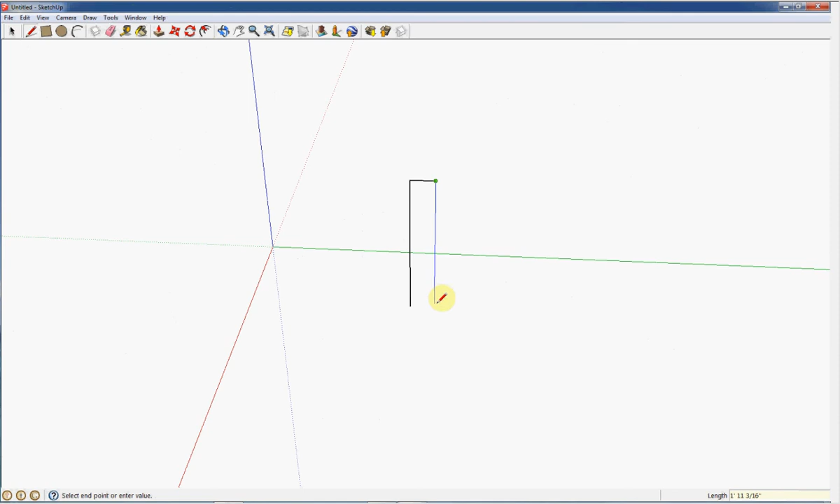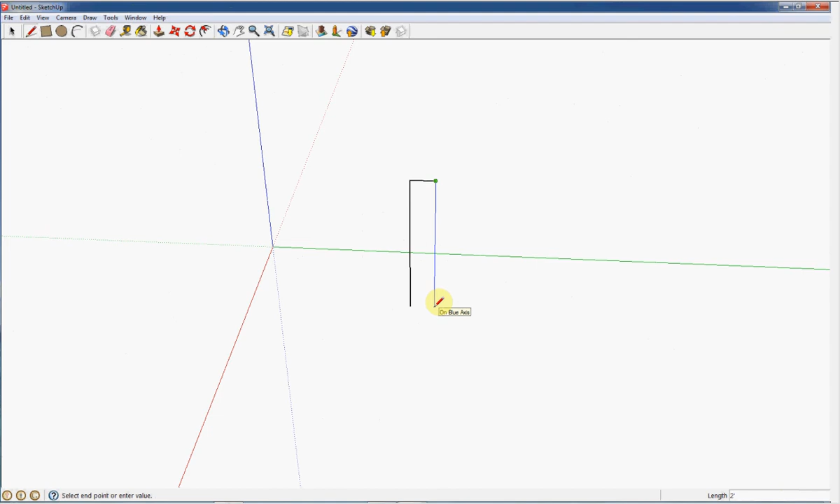Many times when working with SketchUp, if you're not sure where a corner or point is and you want to build to that point to make sure everything aligns, you go to the point you want, then start moving, and it'll give you a hash line showing you where you need to be. It doesn't work 100% of the time, but it works probably a good 90% of the time.

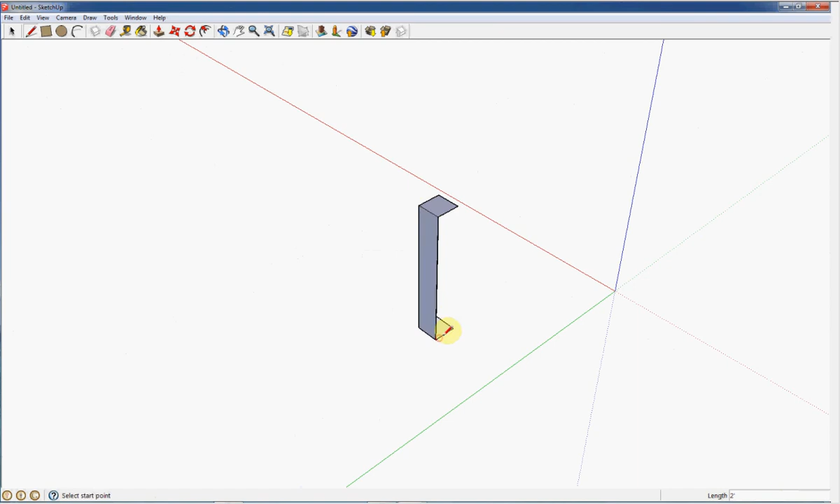It'll tell you which axis you're on almost all the time, and you'll see the hashed lines letting you know your axis is correct and that what you're building lines up with what you've already built, or the lines you're drawing line up with the rest of your diagram, or whatever it is you happen to be building that day.

This is just me showing you that the dimensions are what we say. You can go to tools — there you can use the dimensions, which is exactly what I'm doing. You can move them and make them come out any way you like.

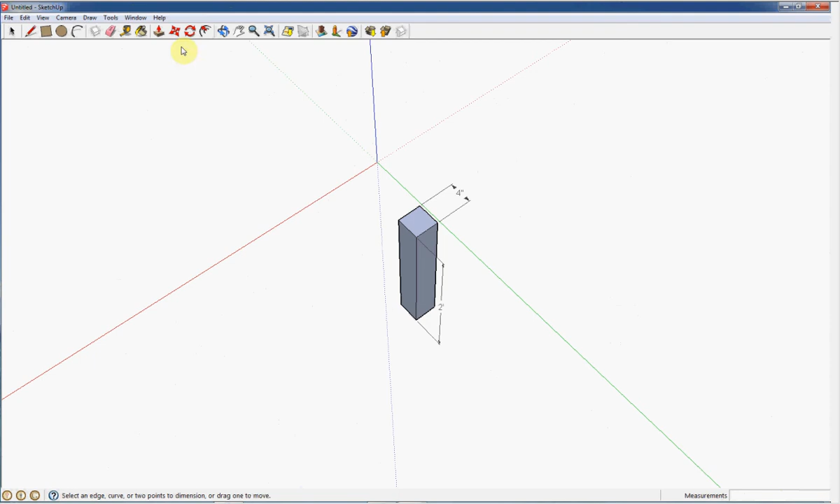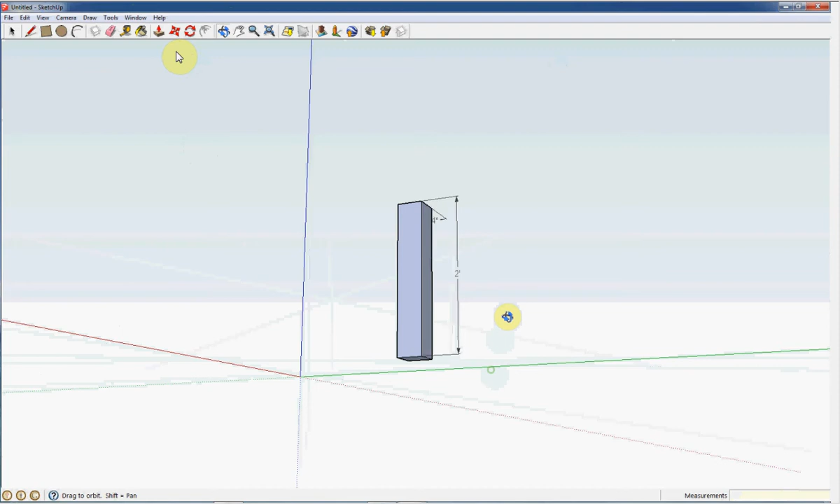Now I'm using this tool, which will enable you to create the thickness for the tube we're using. I'm going back over and backing up a little so you can see better. This tool is called the offset tool — yes, the offset tool. All you have to do is click the outer edge, and it will start creating...

...the box in the middle.

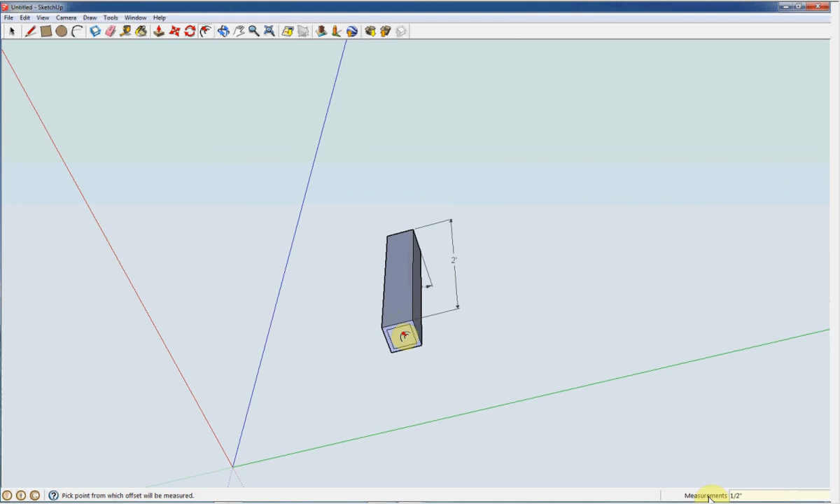Let me back up here a little bit to give you a better example. You'll see that I typed in right here - anytime you're creating anything, you can actually type in what you want it to be. Once you click the very edge of your object and bring it in here, you'll see that box get bigger and smaller. Type in what you want. In this instance, it's obviously a half inch, and you'll create a half inch.

Now all I'm doing here is selecting the portion in the center, just like that, and then hitting delete on the keyboard, and then it gets deleted.

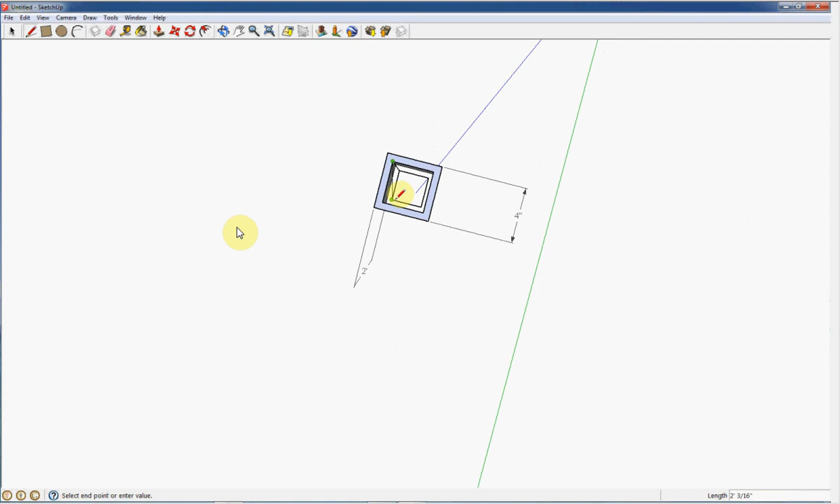Now if you wanted to be fancy or high speed with your model, you can draw the inside portion of it like I'm doing here. There's really no need for the model we're doing, just want to show you how it's done and that you can do it. This is the eraser tool. As that line in the center that was diagonal across wasn't needed, you can just use the eraser tool, go inside and hit it, and it'll get rid of the line.

And if for some reason you make a mistake and you erase something with the eraser that you shouldn't have erased, again, go up to edit and just hit undo.

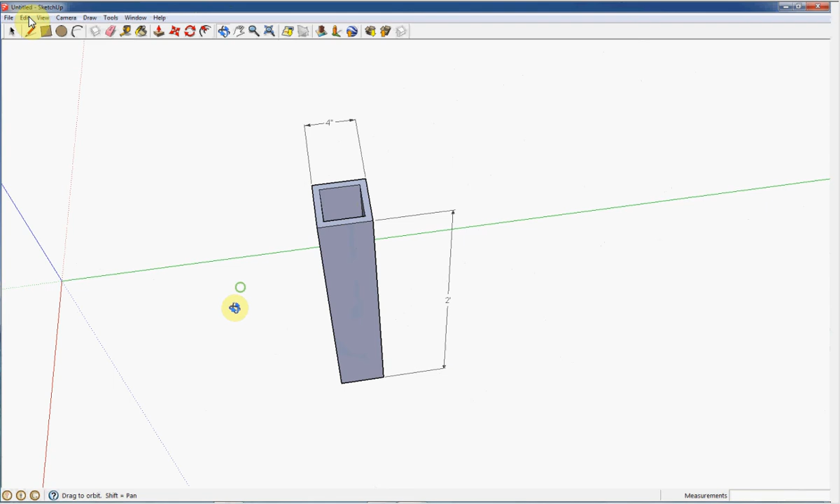And again, this is just showing that this, yes indeed, is half inch thick by 4 inches wide by 2 feet long.

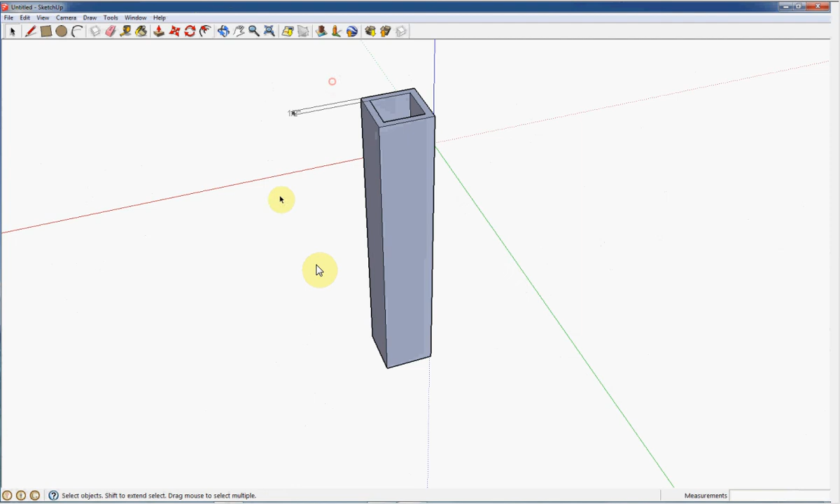This here is the selection tool. As you can see, I'm just selecting. If I can select it here, I might have to turn - there we go. All right, just selecting and then hitting delete. You can do that with your entire structure too. If you don't like it and you want to start over, just use the selection tool, select the entire thing, hit delete, and it'll go away.

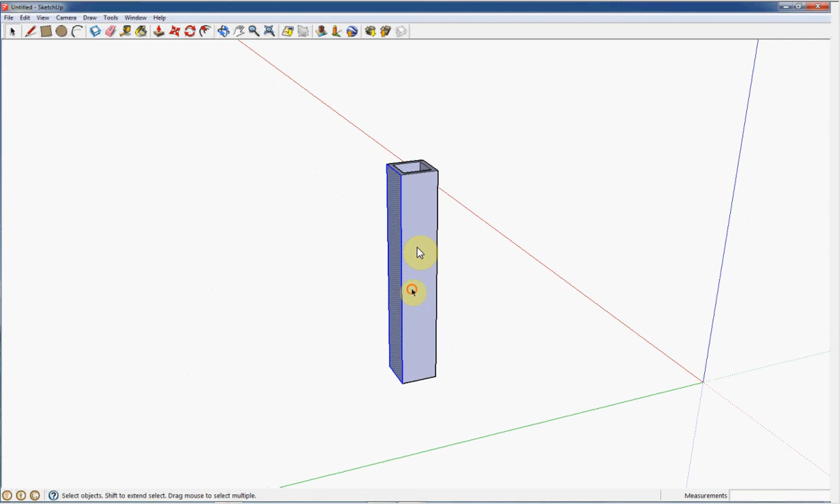All right, this is the selection tool, and what I'm doing here is I'm selecting this front panel of the object - just this panel, not the edges, and that's a single click. In order to get the edges, as you'll see right here, see the dark blue lines? That's also selecting the edges - that's a double click. The single click, you won't have the dark blue lines like this; the double click, you will. Now, in order to select the entire object like we just did, as you can see, that's a triple click. You triple click, you select the entire object.

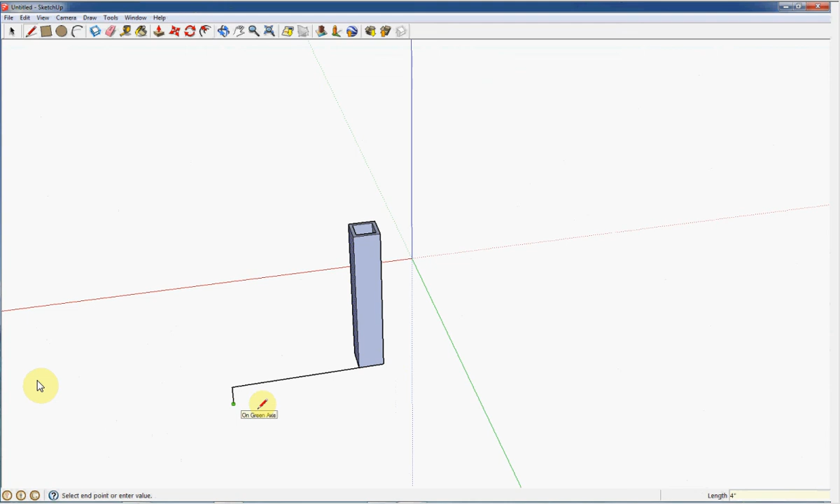All right, here's going to be the rest of the box, or the beginning of the rest of the box. Again, I'm drawing out here, and I'm typing in 2 feet down here in the length section. And again, I'll type in another 4 inches. Then you'll see a lot of the times the hashed lines start to snap through different points that you're building and or edges from areas you've previously built.

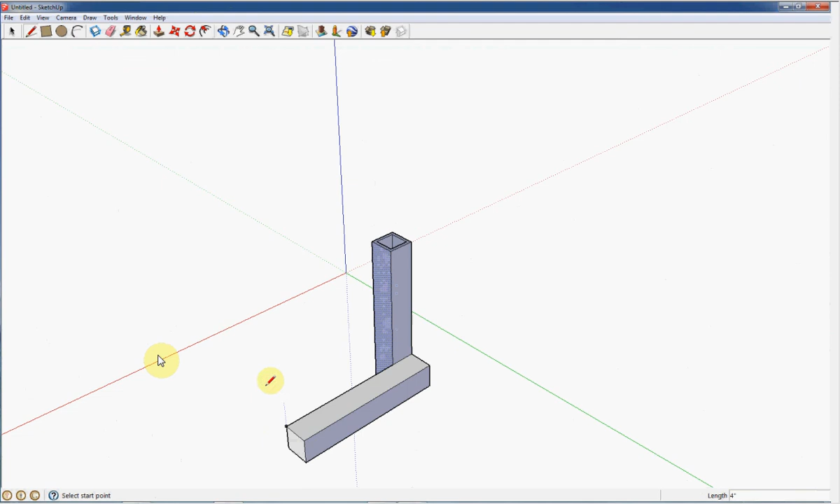Right there lets you know that they are indeed on either the red, blue, or the green axis, and that you're lining up with what you're drawing. It's a very, very nice feature. It lets you know that what you're building is straight, and not only that it's straight, but it's also lining up to what you already previously have in place. So everything is lining up with what you have already made.

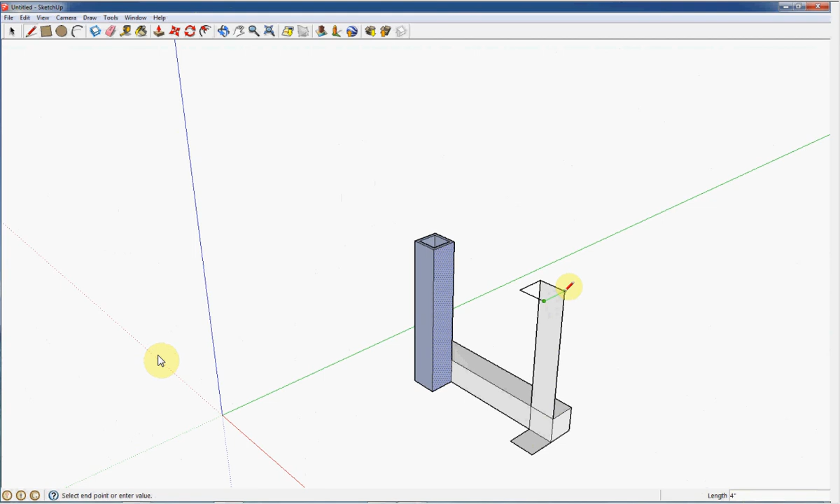You can see this is pretty self-explanatory. And again, sometimes it won't snap. Like I said, it's probably about 90% really good, but a lot of times, just because of the angle that you're at or the angle you happen to be drawing at, and how complex whatever you're building is going to become, sometimes you just can't get in there, and it's easier to click the edge you want to be building it from, or drawing the line from, and go ahead and type in the length in there. I'll do that many times, and there's no reason not to.

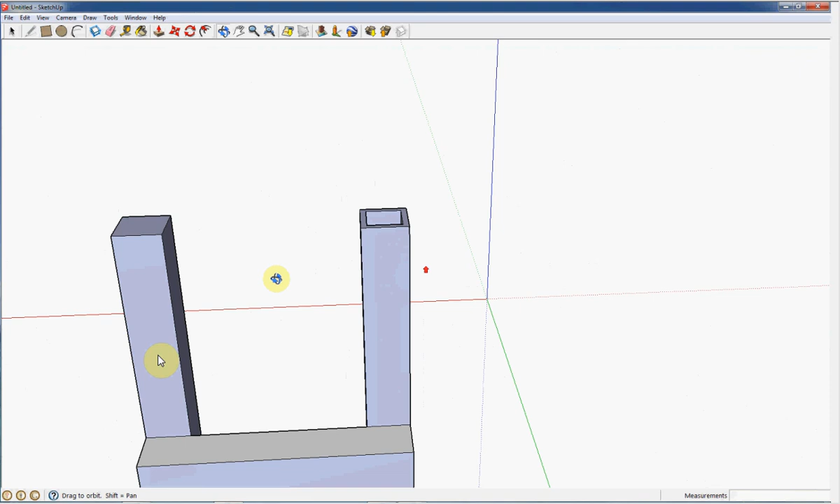Kind of like what I'm doing right here - I'm building myself an edge from the top because I'm going to put another tube here. So what I'm doing is I'm going down 4 inches and giving myself guidelines when I'm building this, to make sure that what I'm putting here is straight and it's going where I want it to go.

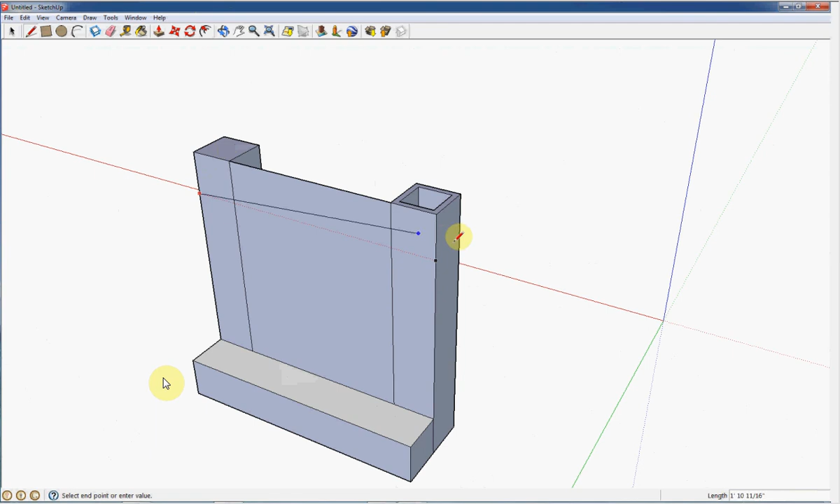As you can see, it actually had that line already there for me because I had a point. I didn't draw it, but there was a point here on the edge, which is why this snapped right over here.

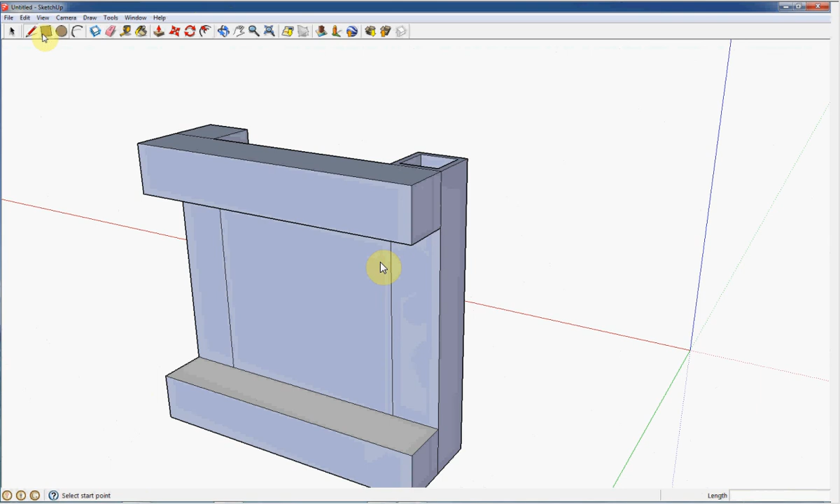You'll see the hashed lines once again. Probably the best part about SketchUp is it telling you which axis you're already on. This is just the select tool, getting rid of pieces that you don't need. It's pretty simple. We're going to fast forward a little bit here to something more completed right after we fix this final piece.

Here we go. We're about 3/4 of the way done.

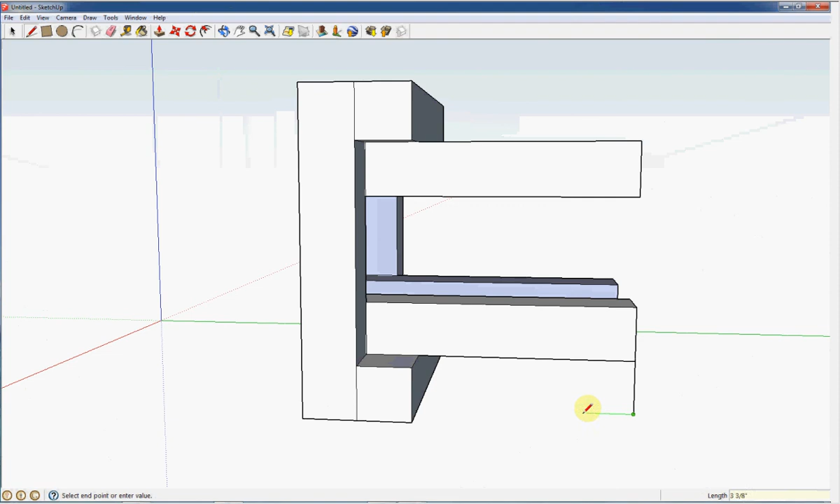I'm just picking this part because when I was first starting to use this, using areas like this was a little tricky. So what I do, as a technique, is give myself guidelines and shapes in order to create another shape. In this case, I'm building a small box. You could either go up here, which is what I'm doing, or by using that box down at the bottom, you could do the same.

For instance, right here, I'm on the blue axis, and I'm going to snap it up, and I end up writing in 2 feet here, so it goes up to the 2 feet. But utilizing this box right here, the original one I did, and the bottom portion of it, I could have gone up another 4 inches. It would have given me that hashed line telling me I'm on the bottom of this plane, and then I could have snapped it over to another 2 feet and done the bottom section of the box.

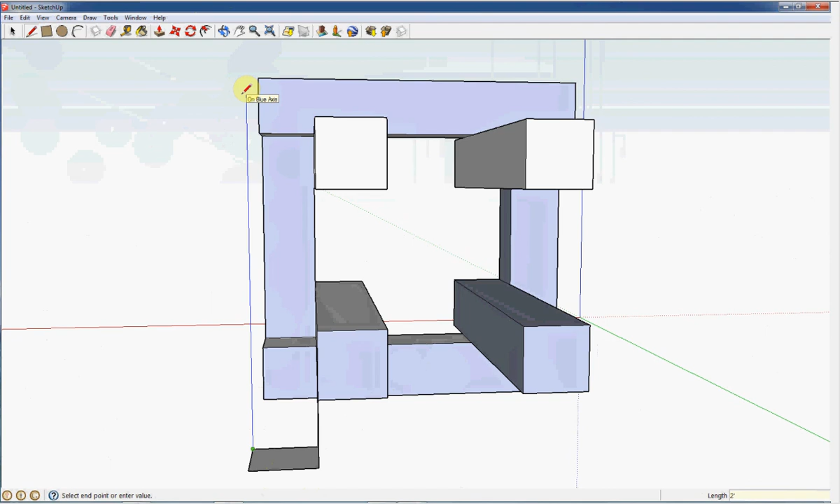Again, just a technique. You might find something that works better for you. I like having guidelines. There's some other tools in here we won't get into right now.

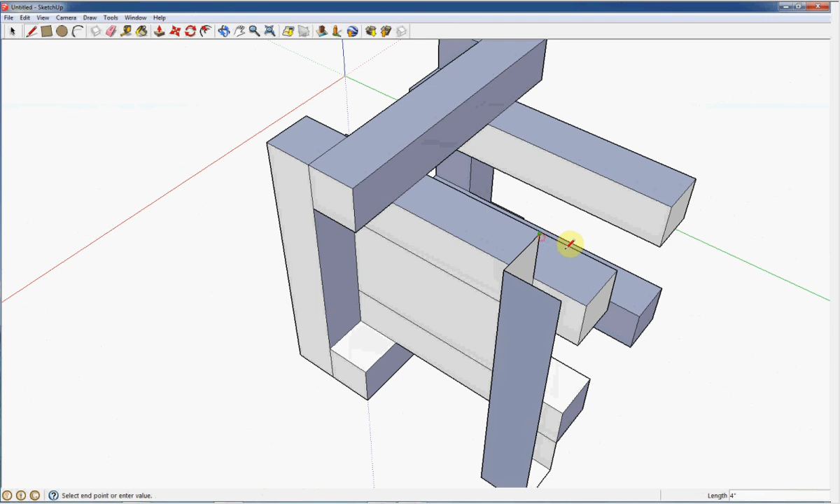That's a little more advanced, but if you go up to your tools section, you'll have a tape measure, and you can draw lines like this that won't really have any bearing on the model itself, but will give you lines to draw from, so you know where you're going. Basically it's like giving you an extra axis instead of just the green, red, and blue. You can use the tape measure function to give yourself different axes.

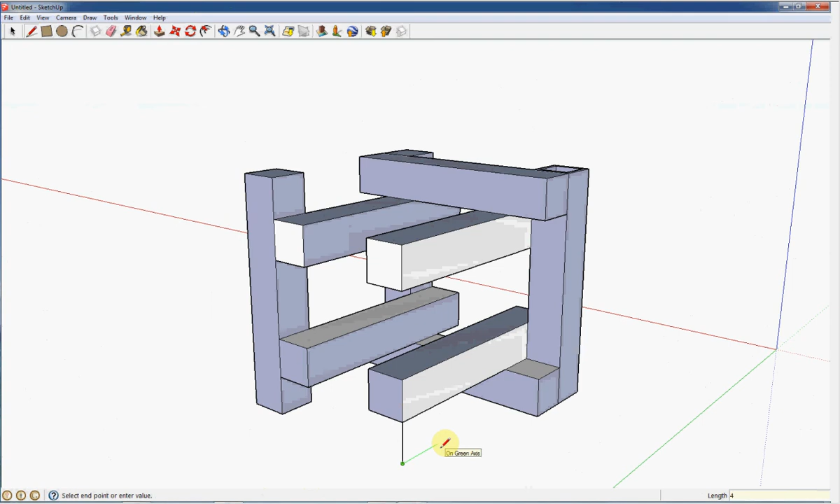And when you're having more complicated figures, it comes in handy. But again, this is just a real basic tutorial on how to build this box that we're building right here.

All right, and this is the completed box here. All I'm doing is just cleaning stuff up, using the offset tool again.

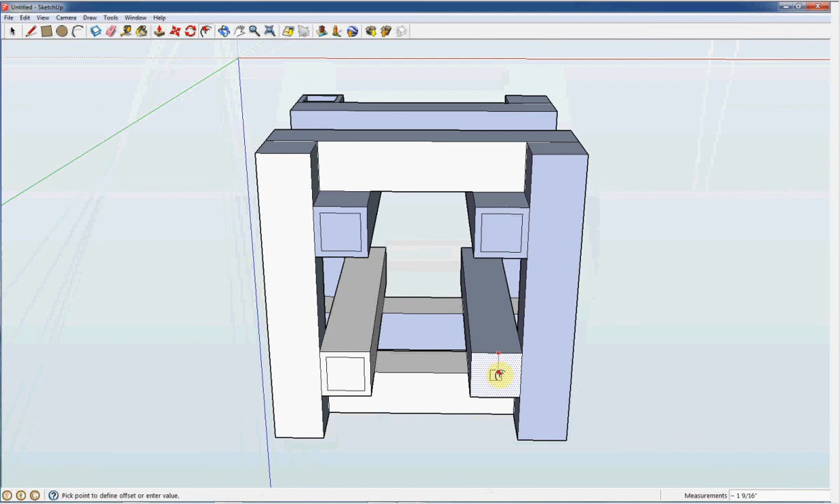As you'll see, I'll do the small box. I'll type into the side or the corner down there 1/2 inch, and that'll create the 1/2 inch margins from the shape you're typing it into.

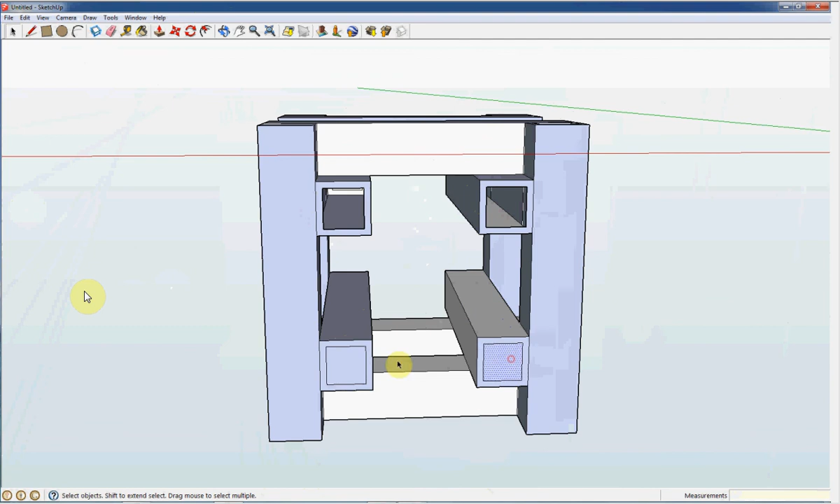And then from there, again, all I'm doing is utilizing the select button, and I'll go in here and click each one of these, hit delete, look through them, click on the back side, hit delete on those as well, and that gives you the internal portion of the tubes you're using.

And you can get as fancy as you want. You can complete the inside. But if this is just the model and there's no bearing on it whatsoever, then it may not be necessary.

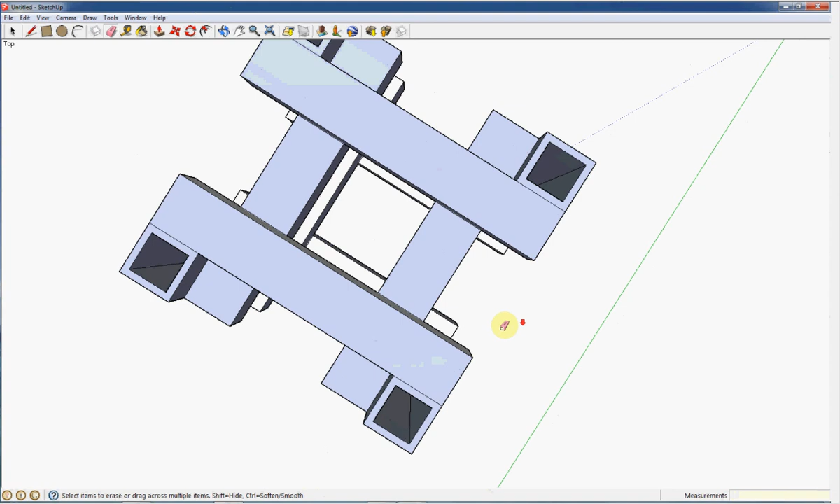And there we go. We have our completed structure, all done up with the insides drawn as well. Now most of the insides are drawn up as well, except the part I'm facing right now.

But just a real basic tutorial on how to build the box, or a tube framed box, if you will. Thanks for watching.